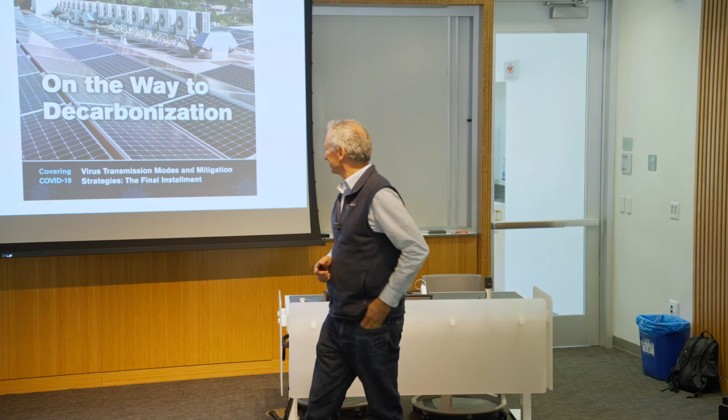I published the first article on building decarbonization in ASHRAE Journal, which is the Journal of Heating and Cooling Systems. It's a US-based organization, but with international membership. You're going to see why I published that article in a journal about heating and cooling systems, because heating is a big nut to crack as far as decarbonization is concerned.

Diana loves me to tell this story. I was a young engineer. I went to school at Berkeley, by the way—don't hold it against me, but I have a lot of love for Stanford. I was working at the Solar Cal Council hotline.

Before the internet, you would call a phone number to get information. The 800 number was a big way of getting information, or you could go to the library. So we would take calls on solar systems for buildings, and I got a call from somebody saying, 'Hey, I'm looking for a solar clothes dryer.'

I was a young engineer—it was an internship, I was in college. I started thinking like a mechanical engineer, about big ducts and fans and a big system that sort of looks like this. Then I said to the person, 'I'm going to put you on hold.' And I said to the other folks on the team, 'Does anybody know what a solar clothes dryer looks like? Because I have a call about that.'

So if we add that up, if you include not just fossil gas, you include electricity, so there's a lot of heating with electricity, it comes up to 4 gigatons of CO2 emissions. So that is roughly about 8% of all global greenhouse gas emissions relating to heating in buildings.

Okay, so Arun Majumdar, who's the dean of the School of Sustainability here at Stanford, he likes to say, I want to talk about solutions that relate to a gigaton scale. Don't come to me with the little things. I want the big things. And so heating is actually a big thing, and we're going to talk a little bit about that.

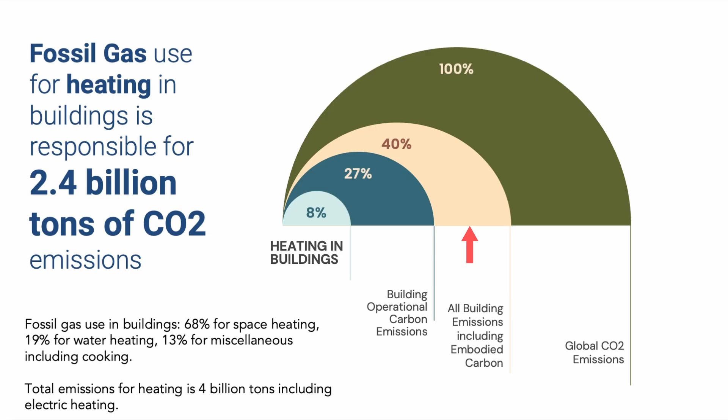But if you look at this graph, 27% of all carbon emissions relate to building energy consumption. And if we include the emissions relating to manufacturing building materials, the biggest part of it is concrete, cement, and then concrete, but also steel, glass, all these other things that we need to build buildings, it comes to close to 40%. Some numbers are 35%, 40%, somewhere in that range of global greenhouse emissions relate to buildings.

So buildings on the demand side are a gigantic part of the problem. And also I like to think a huge part of the opportunity, right?

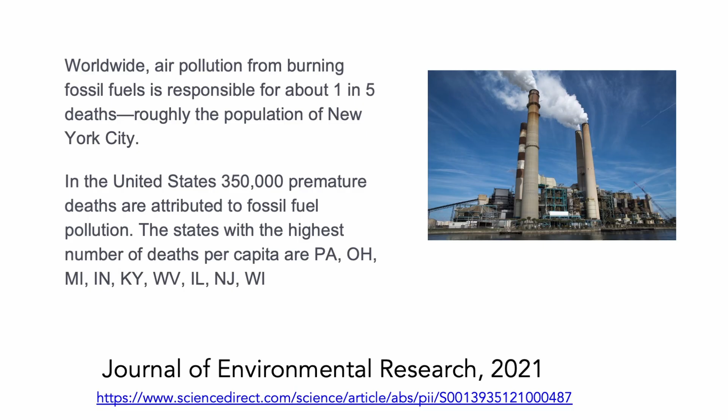So the other thing you guys have probably learned about, burning fossil fuels does create air pollution that directly impacts people's health, right? So worldwide, it's about 1 in 5 deaths related to pollution from fossil fuels. In the US, that's 350,000 deaths per year. So this is a huge thing.

There is debate about, and not in my mind, but people like to debate, climate change and all these other things, but there is this direct thing that's happening right now, not necessarily in the future.

So that's happening. And then in the US, Black communities do bear a disproportionate burden of the use of fossil fuels for a variety of reasons, but there's also an environmental justice part of fossil fuel use.

So for all those reasons, I think that building decarbonization should be a main focus of when we're talking about how do buildings work. I'm going to cover how buildings work roughly, but since this is the energy class, I'm also going to talk about building decarbonization and how that works.

So what we say is the part of the carbon emissions that relate to construction are called embodied carbon. And then the part of the carbon emissions that relate to energy consumption is called operational carbon emissions. Okay, and generally speaking, operational carbon emissions, if we look at it either at the national level or international level, is bigger than the embodied carbon, but they're both significant.

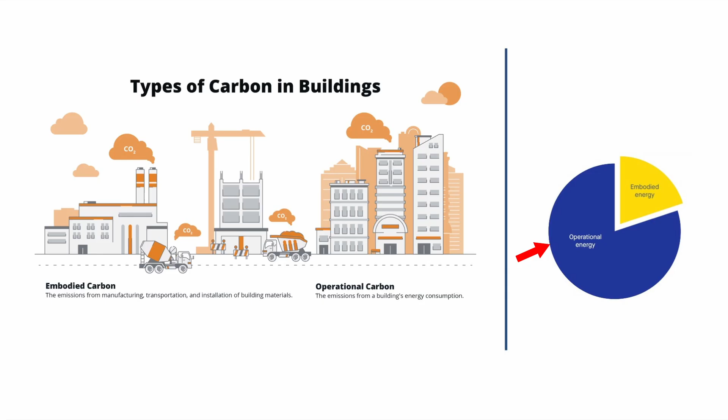So let's just dive a little bit into the embodied decarbonization concept. So if you look at what are the ways of dealing with that, when we look at buildings, the largest part of the embodied carbon is the structural system. So that is, how do we hold up the building? What's at the core of how the building is held up and built? And that is, generally speaking, in commercial buildings, steel or concrete. And in residential buildings, it can also be steel, concrete, but also wood has a bigger role to play globally.

Again, it depends on where you are. In the US, a lot of residential buildings are already made with wood. I live in a house that has wood studs. But then there's other things like glass and furniture and a variety of other things.

But over 50% of the embodied carbon in buildings comes from the structural systems. So right now there's a lot of discussion about alternative structural systems. We can move from concrete to steel, and a lot of markets, especially in commercial buildings, have already moved there. It depends on a variety of cost things.

But we can also now start considering wood structures as a type of structure. One of the areas of research here at Stanford is the embodied carbon of cement, because globally cement is responsible for somewhere around 5 or 6% of greenhouse gas emissions. Just cement alone is huge. So can we manufacture cement in a way that has much less greenhouse gas emissions? There's a lot of research on that going on here.

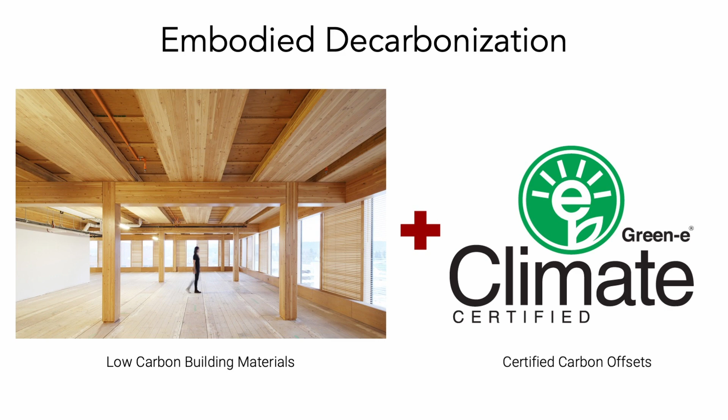But what most people are doing to decarbonize the embodied carbon of a building is looking at low carbon building materials, primarily the structural system. And even wood does have an embodied carbon associated with it. If nothing else, transporting it, cutting it, and getting it ready for building materials does have a carbon emission related to that. So it's not possible right now to get to zero.

So what a lot of folks are doing is they'll do the best they can, and then they'll use a carbon offset of one sort or another. Carbon offsets are a way of avoiding carbon somewhere else so that your project's carbon emissions are offset. I assume you guys have talked about that.

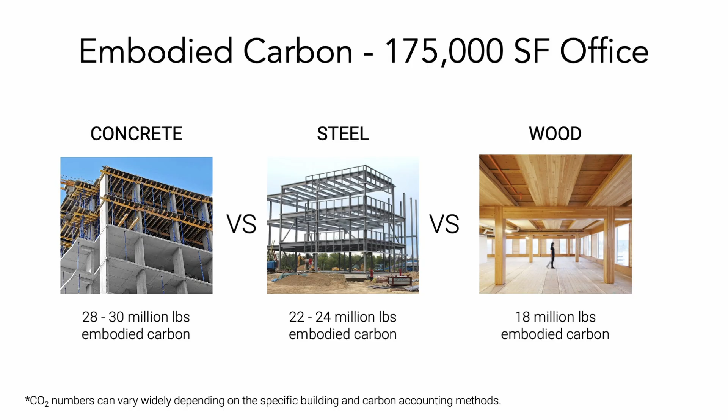So if we look at some of the numbers, this is for a 175,000 square foot office building that I worked on. We looked at the difference between concrete, steel, and wood, and you can see it went from about 30 million pounds of embodied carbon down into the low 20s. So that's good if we use steel, but if we went into wood, we're cutting it almost in half.

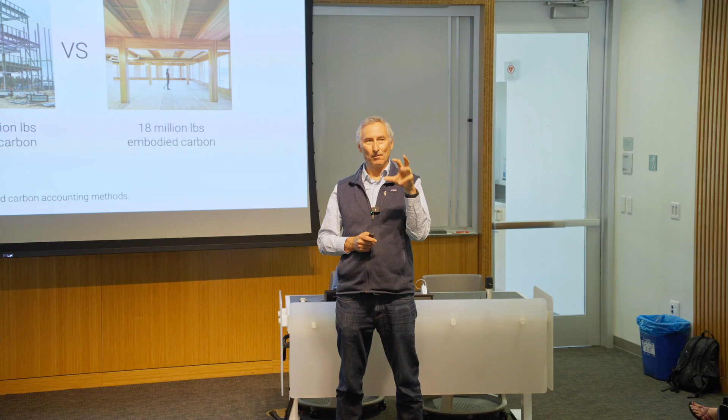So there's still emissions related to wood, but there's a lot of buildings now being built—not high rises, but remember, most commercial buildings in the world are low rise, anywhere from 1 story to 5 to 10 stories. That's the vast majority of square footage.

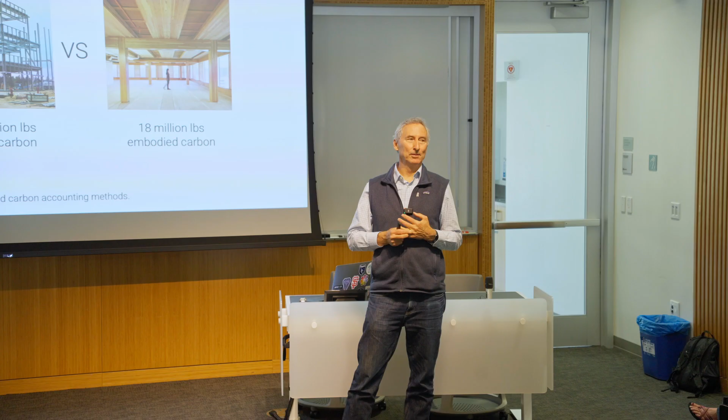So Google, for example, just built a very high profile building with mass timber as a structural system. And they're talking about it a lot, and they're looking at using timber as a structural system in their future buildings. So that's happening.

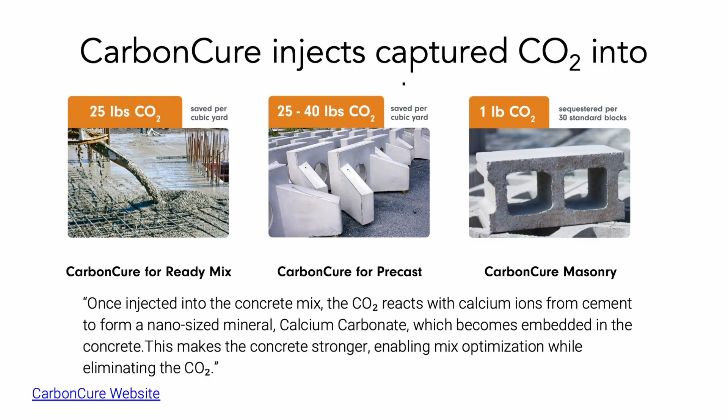And one of the companies that's making a lot of progress on low embodied carbon cement is called CarbonCure. What they're doing is injecting captured CO2 into the cement. So that's a sort of creative or interesting idea. We'll see how far that gets, but it's an interesting thing.

And there's a lot of additives that can be put in the concrete mix that make it still strong, but take sometimes a waste product or organic product and put that into the cement instead of having to put in more cement, which is high embodied carbon. So there's a lot of things going on.

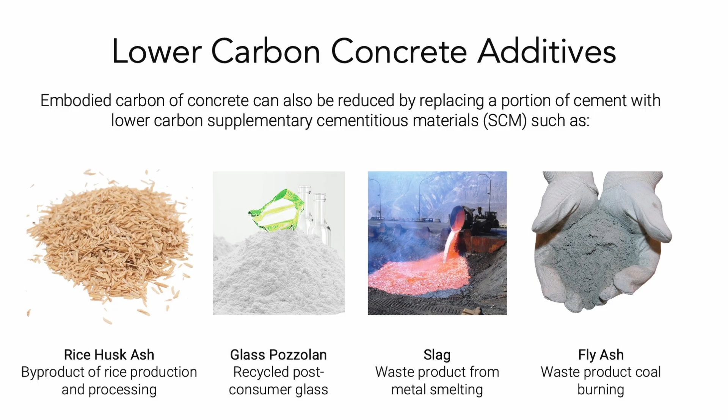I'd say that field of embodied carbon is still evolving, and we're in the early days, but operational decarbonization is actually quite evolved. How long will wood last if used to build the structure of a building?

So if the building does not burn down—because if a building burns, it actually emits all that CO2 into the atmosphere—we can say wood is a sequestration of carbon, so it's actually pretty good if you put it all together. But wood structures that are properly rainproof, which means a good roof and things like that, can last 100 plus years. Most buildings that we're designing that are trying to be environmentally sensitive, if we can design to 100 years, we're in pretty good shape.

And if we can possibly reuse some of that—there are buildings in Europe that I've been in with stone, which is pretty low embodied carbon, just stone, not concrete. But there are buildings with wood rafters and things like that that are a couple hundred years old.

Are there any conversations going on about deforestation when using wood for buildings? If so, what are some measures being taken to avoid deforestation?

This gets into a deep thing about environmental trade-offs, but generally speaking, the wood that's used in buildings is farmed wood. It's not wood from virgin forests, and it's considered to be capturing carbon from the atmosphere, putting that into the wood that then goes into the building that hopefully lasts a long time. So there's that, but there is land that's taken for growing wood, and obviously a virgin forest with old growth trees would be a better environmental thing in that location. But from an overall carbon perspective, using wood instead of cement is better.

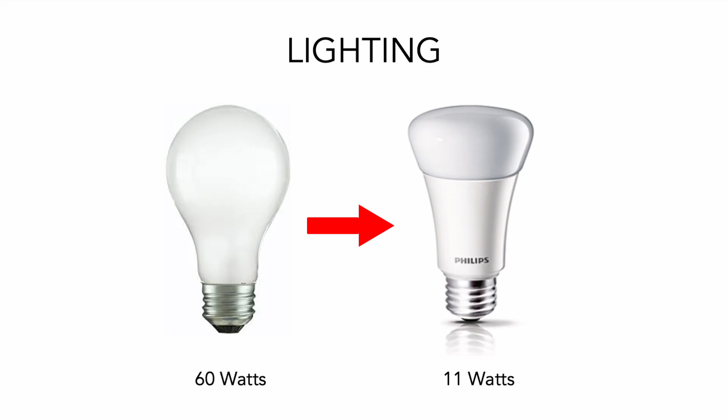So if you look at LEDs, the energy consumption goes from 60 watts to 11 watts. Now you can actually get that same 60 watt bulb in 8 watts LED. And LED light bulbs last almost 10 times longer compared to incandescent light bulbs.

So significantly better. Now, when LED light bulbs came out, I remember they were really expensive and they weren't very good. They were like $10 to $15 for one. And an incandescent light bulb was like 50 cents or $1, and that's just buying it. But then the energy consumption, if you add it up over the lifetime, all these bulbs that are burning out compared to LED, it's going to save the cost of a light bulb several times over. But now the LED light bulb costs around $1. So it went from $10 to $15 down to $1 in about a 15, 20-year period.

So a lot of these things start expensive and then over time get cheaper. So you're going to see that pattern.

Another thing that we've done in buildings to think about energy use is daylight. We're now designing buildings to take advantage of daylight. Can you design the building that brings light in, but without all the glare and too much light? It's not just a glassy building, but a building where daylight was thought of carefully, and we can use daylight to light spaces.

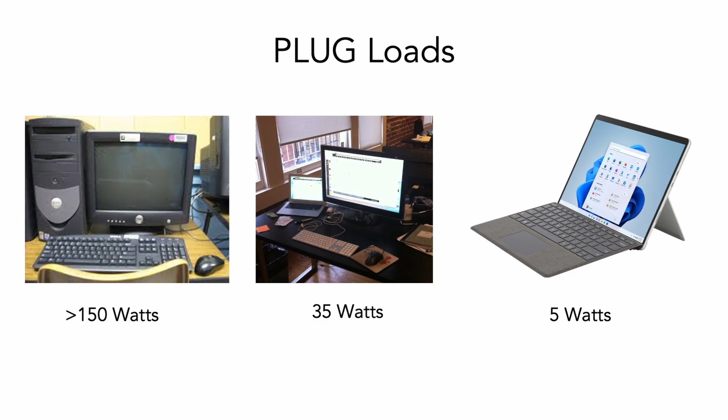And then we've now moved over to laptops with LCD screens, and together, a similar size screen and the laptop can use about 35 watts. The power consumption of computing equipment has dropped dramatically. And now when you have a laptop, desktop, or pad, whatever, those use somewhere in the neighborhood of 5 watts, sometimes 10 watts. Very, very low energy. And the energy's been brought down in large part so that the battery life is extended.

So anyway, that's amazing what's going on. Now we have a lot more computers today than we used to, right? It was sort of a special thing to have a computer. Now it's a requirement that absolutely everybody in an office building has a computer. And now we carry around a cell phone, which is in a sense a computer, right?

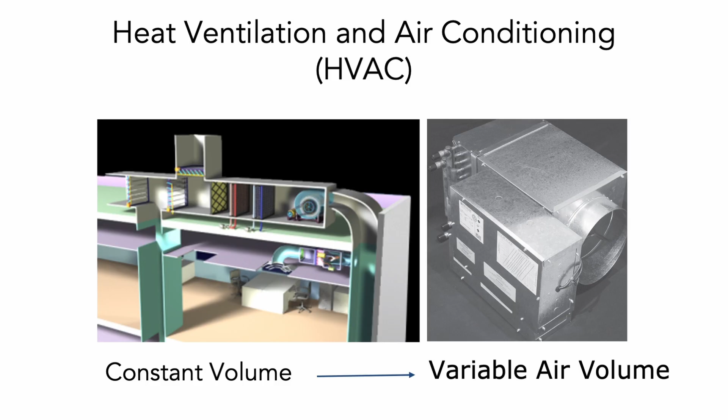So now we start thinking about heating and cooling in buildings. Let's again stay with the large building concept. We started with these systems called constant volume systems, and we moved to a variable volume system. It's sort of like changing from a car that's always running at full speed and you control its speed by putting the gas or the brake on - that's how it used to be in heating and cooling systems. Now they vary the volume up and down based on the need, right? So varying - that's saved a ton of energy, and it's an evolution.

I remember when I was a young engineer working on buildings, and I was asked by my boss to figure out what is this new thing called variable air volume. So I called a few engineers around, older guys, and they were like, 'oh, that variable volume, it's too expensive, it doesn't work, it's a ridiculous idea,' blah blah blah. That's what I was hearing. Fast forward to where we are today, nobody uses the constant volume system and everybody uses the variable volume system, including in this building, right? So that's been a huge energy savings.

So a lot of these things have evolved as we've started to think about, wow, energy does actually cost money and makes a difference. But there's so many more things we can do. When they start thinking about pumping systems - this is what I designed, pumping systems and fan systems - you can track that to how many watts are required for each gallon per minute of water that you're pumping to heat or cool a building, for example. And the way a standard building goes, it's usually about 15 watts for every GPM, gallons per minute.

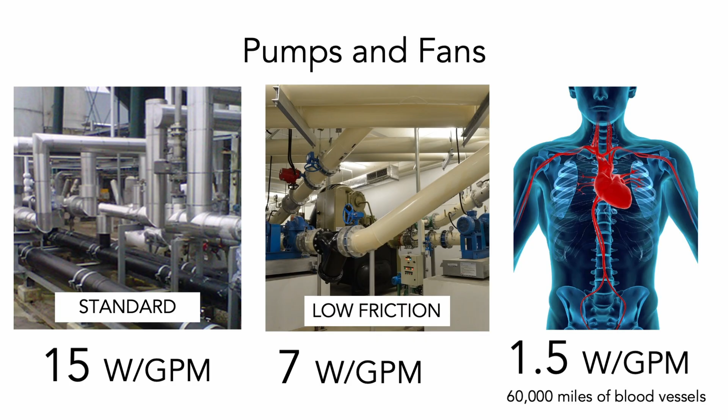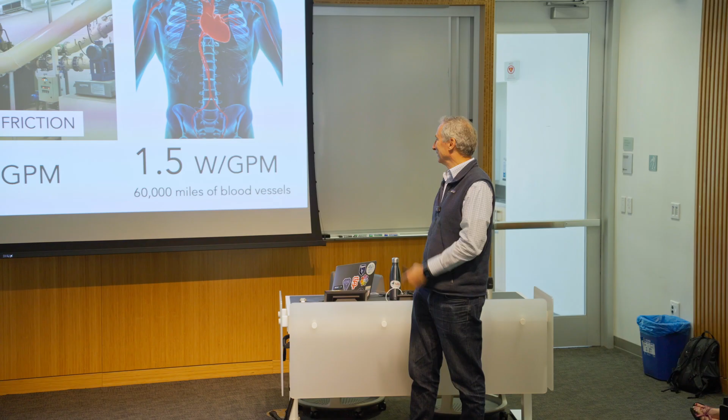When I really focus in and do what I consider to be a really good job, I'll design a low friction system that has smooth pipes and is thoughtfully designed. I can get it down to 7 watts per GPM. But if we compare to the human circulatory system, and you can look these numbers up, it's close to 1.5 watts per GPM. So we're still in buildings nowhere near as good as the human body, which is amazing. Each of our bodies has 60,000 miles of blood vessels, just to remind you how incredible the body is. So not only amazing with 60,000 miles, but it's also super energy efficient.

Anyway, so I like that. There's a lot of blockbusters that have already become standard in buildings. LED lighting is one of them.

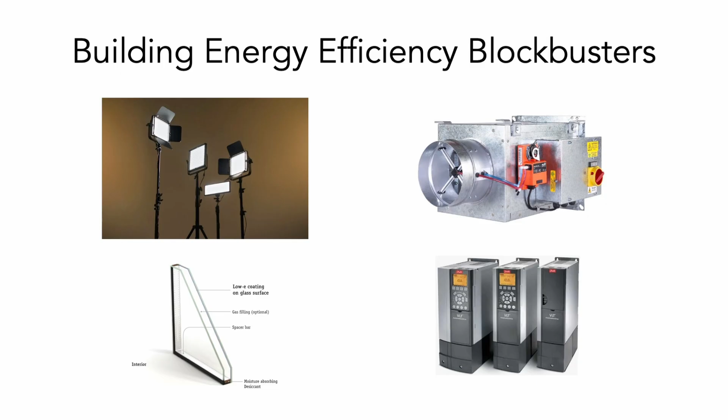On the top right is the variable air volume box, which varies the volume. It has a damper in there and such. That's been huge.

The lower left is low-E glazing, low emissivity glazing, which this building has, and most modern buildings have it, even new residential homes widely use it. There's a thin film you can see through, but it blocks the infrared part of the light. So if you're in a hot climate, it blocks heat from coming into the building. If you're in a cold climate, it keeps the heat inside so it doesn't leak out. Not 100%, but it really slows it down. So it's a big deal.

The bottom right is a box with a variable speed drive that controls motors to ramp up and slow down. Think of all the fans and pumps in buildings, and compressors for air conditioning - we can speed those up or slow them down as needed. That is gigantic.

All of these things have been huge. They say LED lighting globally has reduced the need for a few hundred power plants because we have more efficient lighting compared to incandescent lighting. So it's a big deal.

If we look at when we started focusing on energy efficiency in buildings, it was really during the 1970s with the Arab oil embargo and the oil crisis. That brought energy into focus globally. So ASHRAE, the organization that deals with heating and cooling, got together with the Illuminating Engineering Society, the lighting guys, and said let's create an energy standard for buildings - what does an energy efficient building look like?

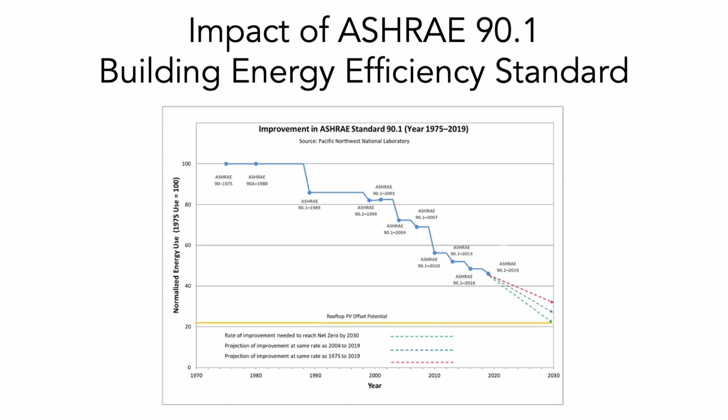So we created the standard, first created in 1975. If we compare a building built in 1975 under that standard to what the standard requires today - which isn't very hard to meet with today's technology - the new version represents a 50% reduction in energy. So that standard, considered pretty easy to meet, has resulted in a 50% reduction in the energy use of new buildings.

That's kind of amazing, because I ask a lot of people how much energy do you think we can save in a building? They say oh, 5%, 10% maybe - but it's already been 50%.

We can comfortably get another - in this case it was 44%, but let's just call it 50% - energy reduction beyond that standard.

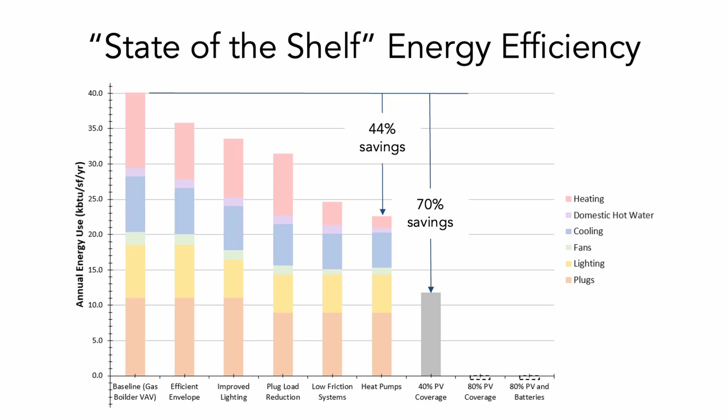That's also significant. If we start adding photovoltaics on the roof, a modest amount, we can get to 70%. In this case we modeled a 3-story building covering 80% of the roof, which would cover all the energy use on an annual basis. So we could really get it down to zero.

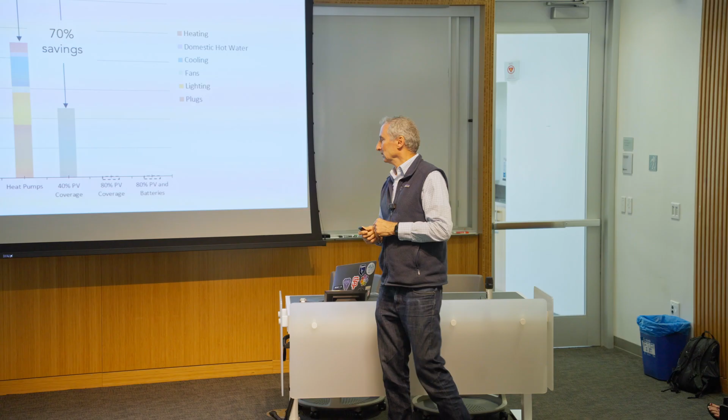The efficient envelope includes better insulation, better windows, a tighter building envelope which is weatherization - those two are similar. All best practices, but nothing crazy. The insulation isn't high tech, we're just using more of it, but using the best windows with low-E coating and things like that.

Does everyone have to follow the ASHRAE - American Society of Heating, Refrigerating, and Air Conditioning Engineers - standard?

The ASHRAE standard has been adopted in some states as an energy code, but in many states it's not required. Several countries around the world use the ASHRAE standard directly or as the foundation of their own national building energy standards.

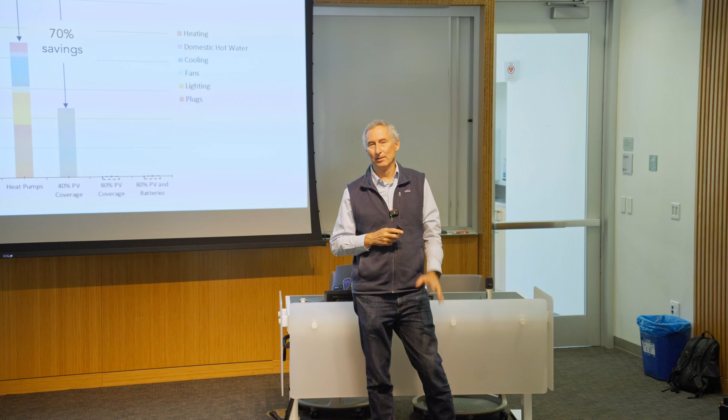In the US, I don't know the exact numbers, but I think about half the states have a required energy code for buildings. But those half states, one of them being California, probably represent 3/4 of the US population. So high population states like California, Florida, New York, Texas, Washington State all have energy standards for buildings. Some are more strict than others.

So what are the next generation of energy efficiency blockbusters? Heat pumps are front and center, and I'm going to talk about that in more detail.

This idea of integrative design - there's a whole class on integrative design here taught by Amory Lovins, and if you have the ability to take that class, I would recommend it. The idea of integrative design is how do we integrate these ideas together to come up with more creative solutions.

Think about a battery electric car. It's not that engineers took a normal car and put batteries into it. What they did was say, can we actually design a more slippery car, a car with lower resistance? Can we do that so the batteries are smaller? And then because we don't have the need for a huge trunk in the front, maybe we can bring the front down a little bit to make it more aerodynamic. So there are all these interactive effects.

That's integrative design. So if I put better windows in the building envelope, can I make the heating and cooling system smaller? You start working things together. I'm simplifying what can become a very complex set of interactions, but that's integrative design.

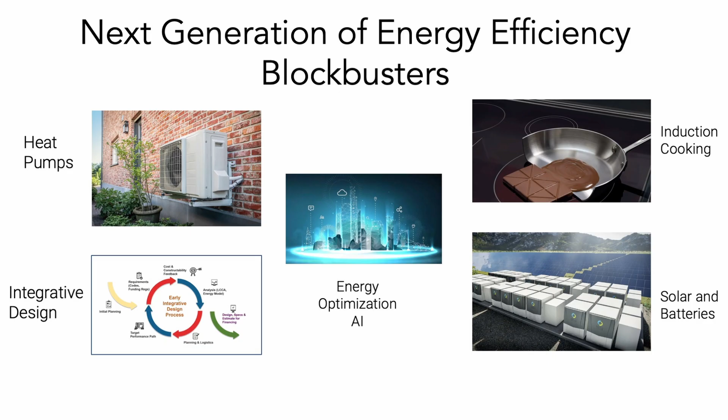Induction cooking, which I'll talk about a little, is another big blockbuster. And then solar and batteries - these can and are being used at the building level, and also at the grid level, which you guys have learned about. That's a big deal.

And then in the middle there, AI for energy optimization. In fact, I wrote a paper with a few graduate students here about how AI is going to change how we design buildings, but also how we operate them. Deep optimization is going to be possible. We think that in existing buildings, lowering energy consumption by 5 to 10% is a realistic estimate of where we'll be with AI in the not too distant future. I think that's going to be very big.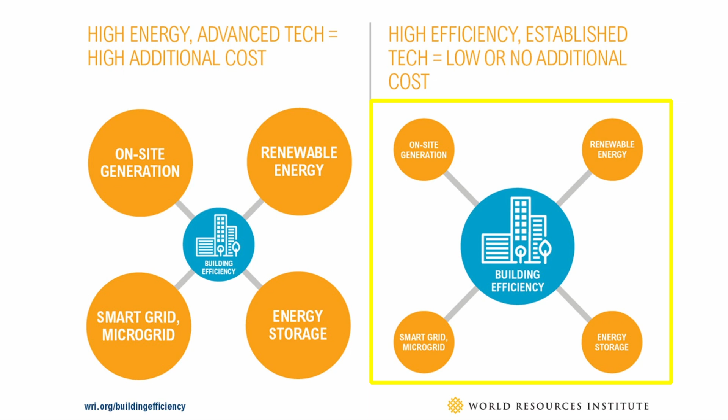When we look at it, on the left we could have not very much building efficiency, but then that means we're going to need bigger on-site generation, renewable energy, smart grid, or energy storage - these things have to be bigger. Or we could take the path on the right, making the building efficient as a key strategy, then we'll need less on-site generation, less renewable energy, less grid - all these things.

Oftentimes people think about the supply side - we're just going to build more and more solar. But if we make buildings efficient, we can build 30% or 50% less solar, 50% less power lines and battery storage, and all these things that are difficult but good - the right thing to do. Efficiency is going to win.

The other thing a lot of people talk about is how fast can we decarbonize. Speed matters right now from a climate change perspective, so we need to move quickly. To say efficiency doesn't matter, we'll just get photovoltaics and wind power to the building - okay fine, that's happening, but it's just going to take longer for us to decarbonize fully or have dramatic reductions in carbon emissions.

That's an important thing. There's a retired professor, Jim Sweeney, here from Stanford, who with some graduate students wrote a book on energy efficiency's impact at a macro level - the whole economy, focused on the US economy.

They said, okay, if we had the same efficiency equipment we had in the 1970s and it just got locked in at that efficiency - car efficiency, building efficiency, trucks, aviation - if all those things were locked in at 1970s efficiency, we would have energy consumption significantly higher than where we ended up.

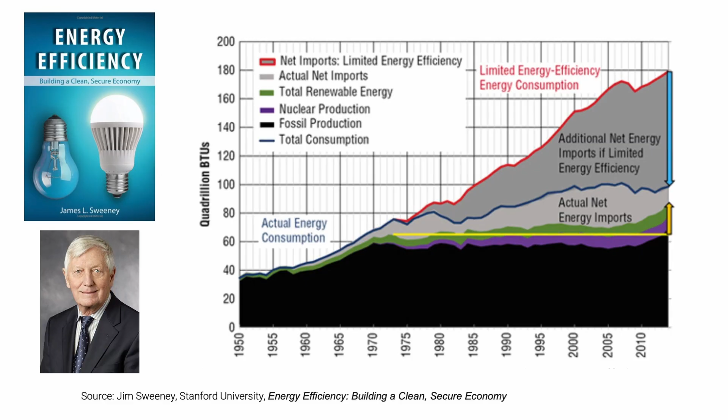Their study was through 2015, so it's a little dated now, but the data is important because it's a decades-long study. What they found is that energy efficiency reduced our demand by 30% in the US, which is more significant, almost by an order of magnitude, than all the solar and wind and nuclear added to the grid during that same time. So energy efficiency is not something we hear about a lot from politicians or policymakers, but it is a workhorse of meeting our energy services demands.

We don't really have energy demands, we have a demand for energy service, right? The saying goes, we want hot shower and cold beer. We don't necessarily want kilowatt hours or BTUs - those things don't matter to us as individuals. So we need to focus on what we're trying to achieve here. So, that's energy efficiency.

The next thing we need to focus on is how do we electrify buildings? Remember, if we're burning a fossil fuel at a building, like for heating, we're just burning fossil fuel and emitting CO2 at the building. We think, oh no, it's just a little thing - like the boiler for this building would be like a third of this room. But that thing is putting out CO2 every single day, and when you add it all up, it's 2.4 gigatons of emissions for heating buildings, primarily space heating, but also water heating.

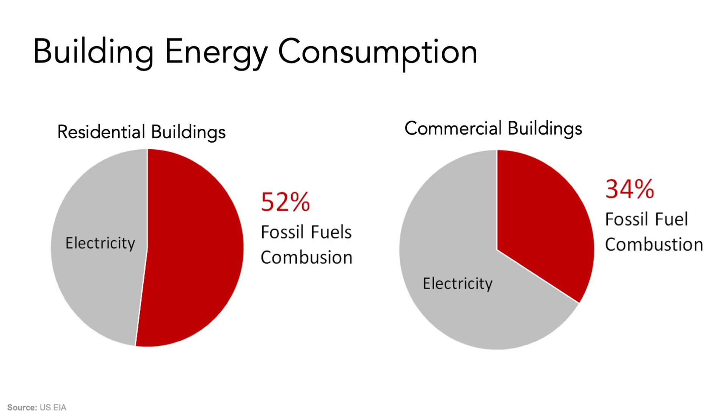So it adds up. We want to electrify buildings - we don't want to be burning fossil fuels at buildings. If we look at US data, residential buildings, 52% of their energy requirements - lighting, everything put together - is met with fossil fuels. And in commercial buildings, 34%. That's mostly all about heating again, heating or water heating. So it's a significant part of the overall energy picture.

In the US, 24 states have committed to have zero carbon electricity by 2050 or sooner. There's already a lot of countries that have zero carbon electricity: Costa Rica, Kenya, Uruguay. The list goes on of countries that are at 90% or higher carbon-free electricity. It's surprising to me - I looked at it recently, and the number's somewhere in the neighborhood of 20 or a little bit more than that.

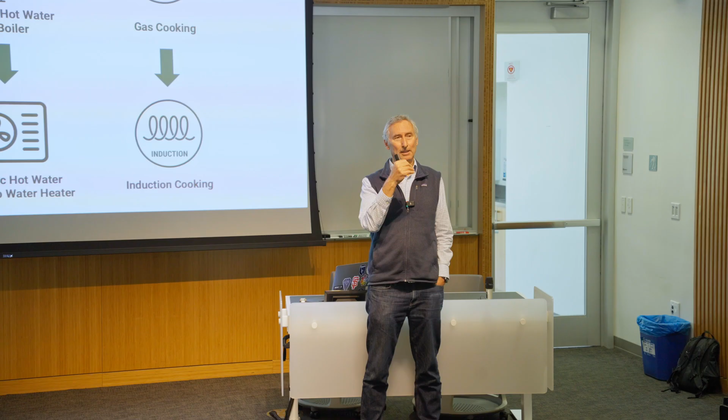California, for example, is moving quickly. We're already at 60% carbon-free electricity on an annual basis, and by 2045, it's legislated it has to be 100%. So, how do we electrify buildings? For space heating, we can use a heat pump - I'll describe that in a second.

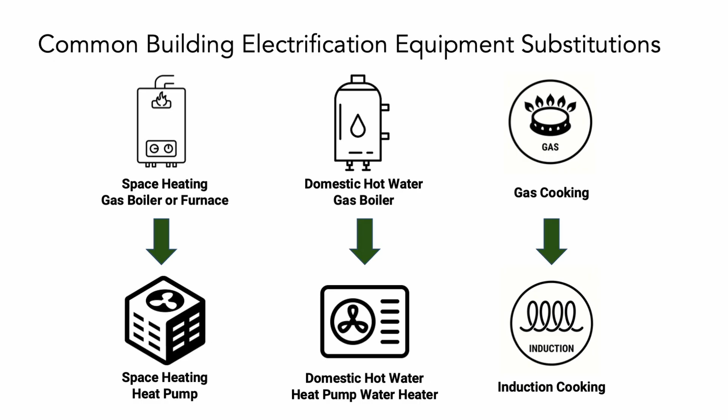For domestic hot water, we can also use a heat pump. We can use electric resistance heating, but electric resistance heating, which has been around for a long time, is very energy intensive. For gas cooking, we can go to electric resistance cooking, or the better, more modern version called induction cooking.

So if we look at heat pumps, how do those work? With a boiler, we put in 100 units of fuel and we get out 85 units of heat. That's an 85% efficient boiler - that's how we do fossil fuels. It could be a furnace, it could be a boiler, whatever.

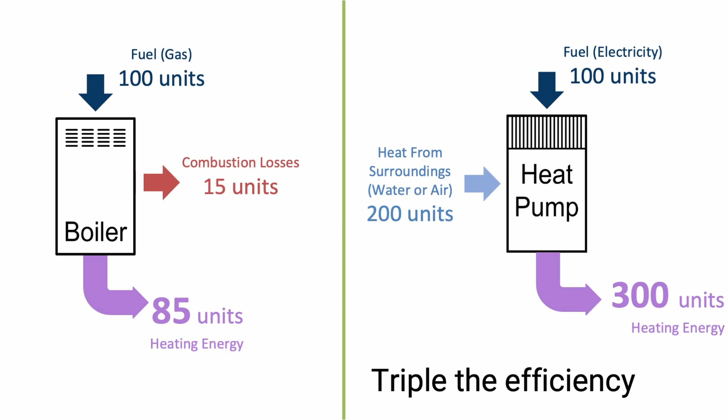For heat pumps, you put in 100 units of electricity and you'll get 300 units of heat out. You're like, wait a minute, that doesn't sound right. The way heat pumps work is they're able to pull heat out of the surrounding, usually air or atmosphere, sometimes connected to the ground, and move that heat into the building. It's the same way a refrigerator works - refrigerators pull the heat out of the cold box and dump it into the kitchen.

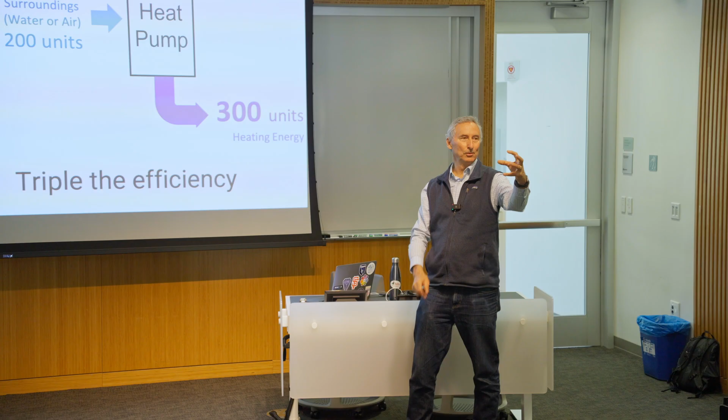That's how refrigerators work, it's the refrigeration cycle. So we can use that same refrigeration cycle to pull heat out of a cold environment outdoors and put it into the building. So we triple the efficiency. Heat pumps are a big deal on efficiency, but they're also a way to electrify heating - in a sense, we're killing two birds with one stone.

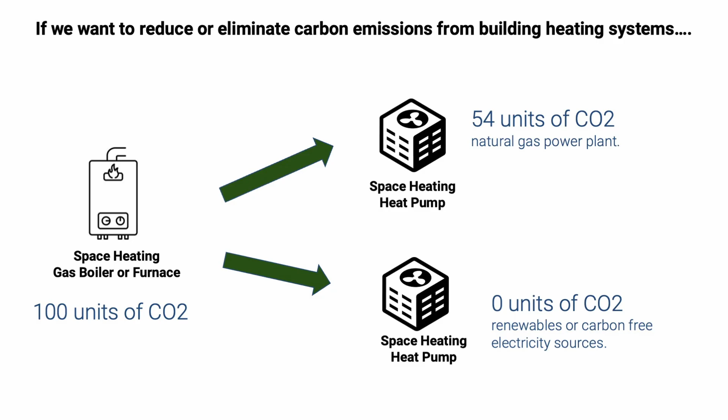Or you can have your cake and eat it too. So if we look at it from a carbon perspective, if we have a boiler putting out 100 units of CO2, that same heat pump, if it's powered by natural gas at a power plant creating electricity, because the power plant is efficient and heat pumps are super efficient, we'll get 54 units of CO2 emitted at the power plant instead.

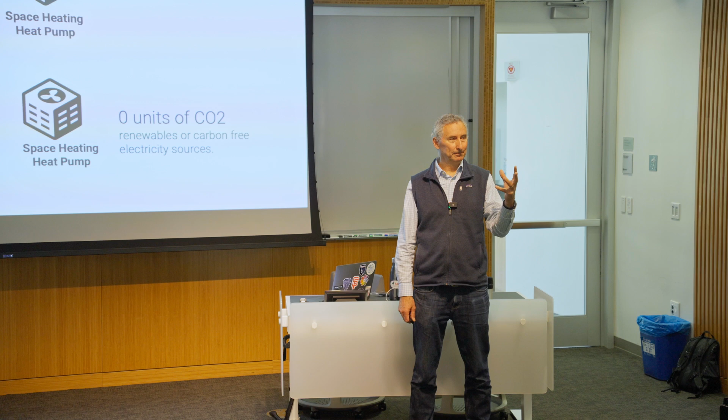Same thing with heat pumps. Even if we have a 100% natural gas grid, we're cutting our CO2 emissions in half. But most grids in the US and globally are not 100% gas or 100% coal—there's some mixture. So if we're able to plug that heat pump into a zero carbon emission grid, we can get the CO2 emissions down to zero.

I have solar on my house, and I also try to run my heat pump in the daytime, when I know there's more solar electricity on the California grid. So between my solar on my house and getting renewable electricity from the grid, I'm close to running my heat pump with zero CO2 emissions. So something to think about.

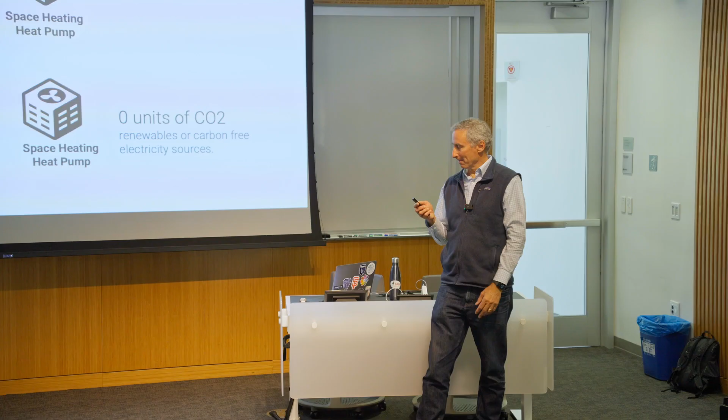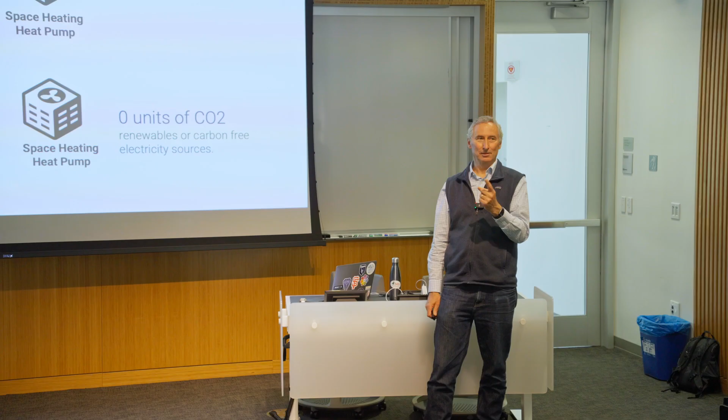Now, heat pumps—remember that number, 2.4 gigatons. Heat pumps have the potential to eliminate that. When you talk to people at energy agencies, like the International Energy Agency based in Europe, thinking about energy policy globally, heat pumps are a huge part of the conversation. I don't mean to harp on just a heating system—I just want heat, don't tell me about the details—but heat pumps are really big. They're a really big deal.

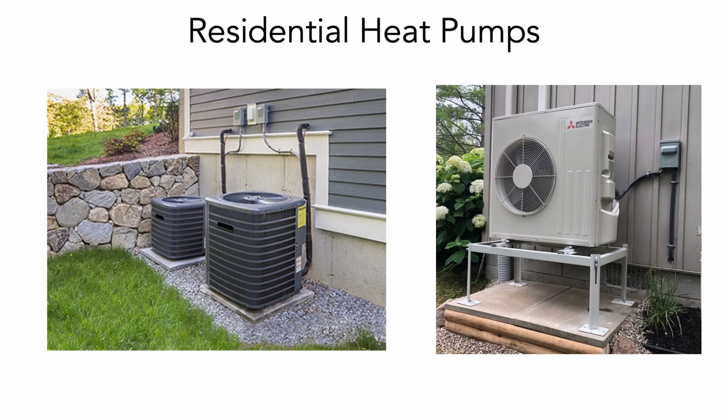So this is what they look like on people's homes. We've actually had heat pumps—you can get an air conditioning unit that can reverse and do heating as a heat pump. On the left, we've had those kinds of things for several decades in the US. But more commonly now are these skinnier, suitcase-shaped units popular in Asia, now globally available. I have one on my house here in California, and it can do heating or cooling—one piece of equipment can do either because it uses that refrigeration cycle. It's actually really nice.

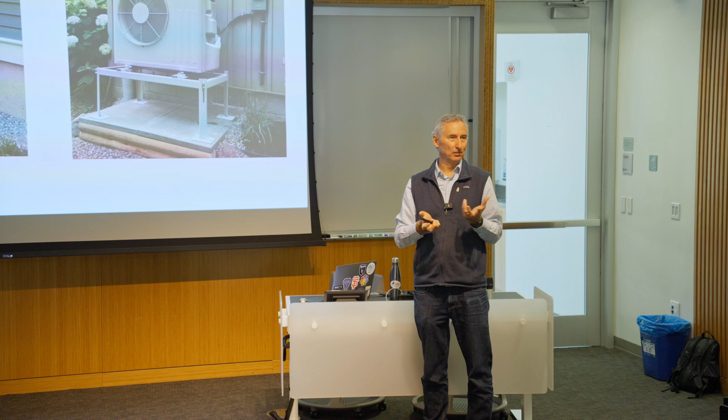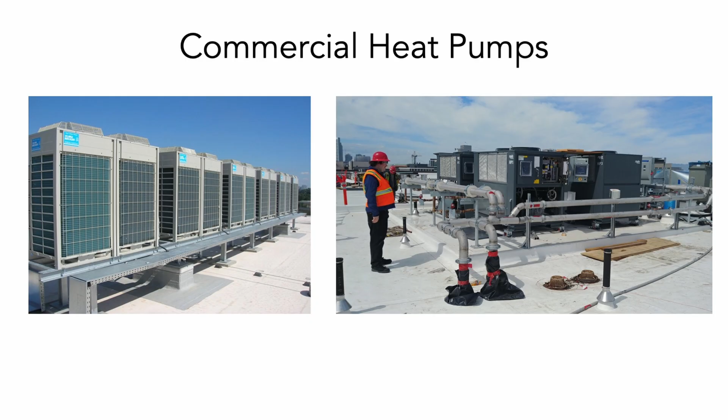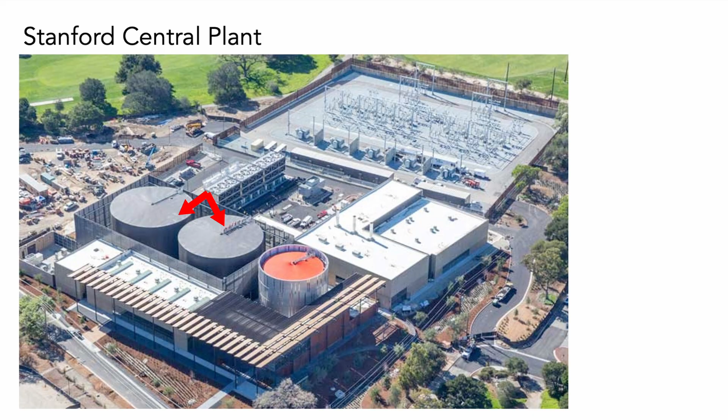And you can really scale it up. Stanford has a central energy facility that makes heating with heat pumps. It uses big machines called chillers that make chilled water for cooling buildings as well as hot water. It makes both, stores them in those big tanks, and then distributes them around the campus. So it can be really small, and it can scale up to really big.

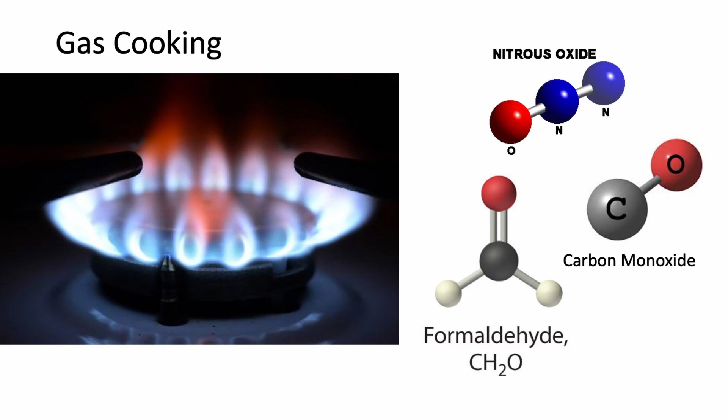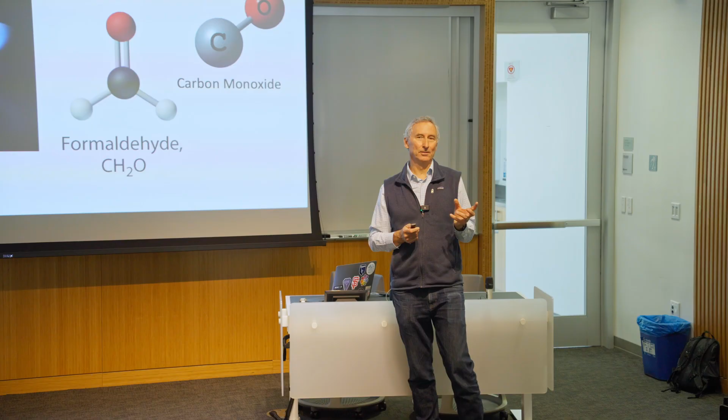So a little bit about gas cooking. Gas cooking is popular in a lot of places, as is electric resistance heating, but gas cooking—the problem is it does emit a variety of pollutants into the kitchen area: nitrous oxides, carbon monoxide, formaldehyde, and now a group at Stanford has been doing a lot of research on benzene emissions from natural gas burning in the kitchen. Benzene is a very well-known carcinogen, not to be ignored, and the levels are well above what's considered safe in kitchens.

If you do have a gas stove, you should always use the exhaust when you're cooking. But induction cooking is the modern replacement to that.

Gas cooking, because so much of the heat goes around the pot, it's only about 30% efficient. Induction cooking, we can get up to 80% plus efficient. So significantly more efficient, but induction cooking uses a magnetic field to heat the pot.

It moves really fast. It typically boils water faster than gas stoves. It's more precise. You can get to the temperature you want more quickly, medium high, and it's not like the electric resistance stove of the past where it's really slow and has that coil that heats up. It doesn't do that, it's a magnetic field.

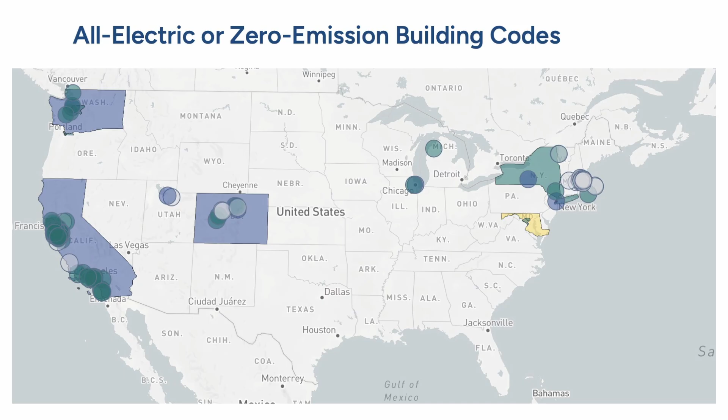There's commercial versions of it, there's residential versions of it. So anyway, if you think there's all these strategies for electrifying buildings, now there's all-electric or zero emissions building codes in a variety of places in the US. And generally, what we're seeing is the market for these things growing very rapidly.

In 2023, heat pumps in the US, there were more heat pumps sold than gas furnaces, they crossed over. Europe is going very hard into heat pumps. Why? Because they discovered that their natural gas supply from Russia was somewhat fragile. And so there's a big push to transition there. A variety of other countries in Asia are also focused on that.

I have a couple students in my class who are from the Middle East, and they're like, hey Peter, energy in our country is super cheap, water is more expensive than gasoline and things like that. But what they've told me is that water heating in these countries, Saudi and Kuwait, the vast majority of water heating is done with heat pumps.

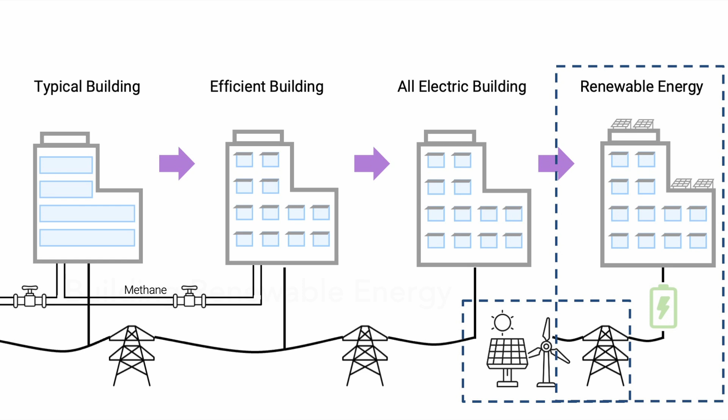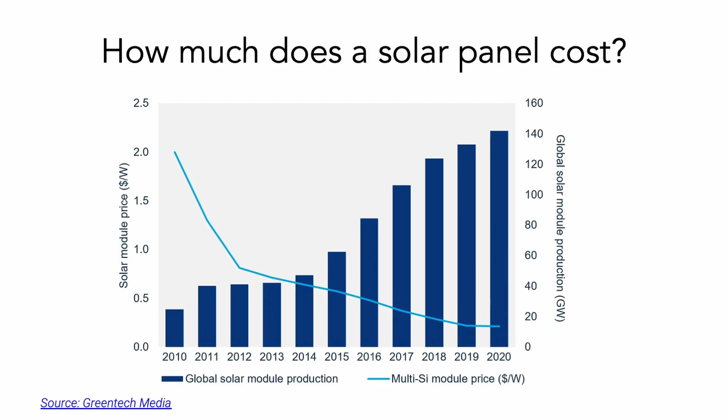Interesting, so we're seeing a lot of movement in that electrification. And then building renewable energy is the last little piece of our puzzle. And the thing you should know is that when I was your age, solar cost about $20 per watt. Today, it costs for a solar panel, just the PV, it's down around 20 cents a watt. That's a factor of 100 reduction, not a factor of 10, 100, $20 down to 20 cents.

So solar is, every time it goes down, there's a surge in use globally. Globally, last year, 80% of all new electricity added to the grid was either solar or wind. 80%. Okay, so solar and wind have become not just affordable, they've become more affordable than gas and coal and nuclear power plants. And that's why there's just a surge in growth in solar.

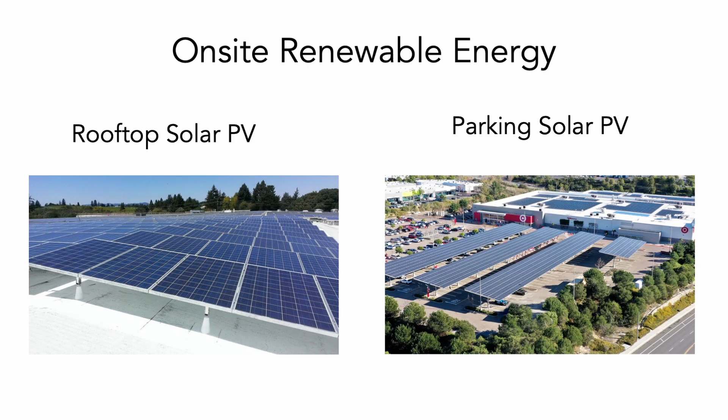But at buildings, we can put solar on the roof, we can put solar over the parking, there's a variety of things. Now, if you're in an area like my students who are in the Middle East, where electricity is so cheap, they're like, okay, we're not going to put solar on our building because electricity is so cheap. But most people in the world live in places where electricity is relatively expensive. And putting solar on the building, even if there's solar on the grid, solar on the building can be an affordable way to generate your own electricity. And so we are seeing a continued interest in solar on buildings.

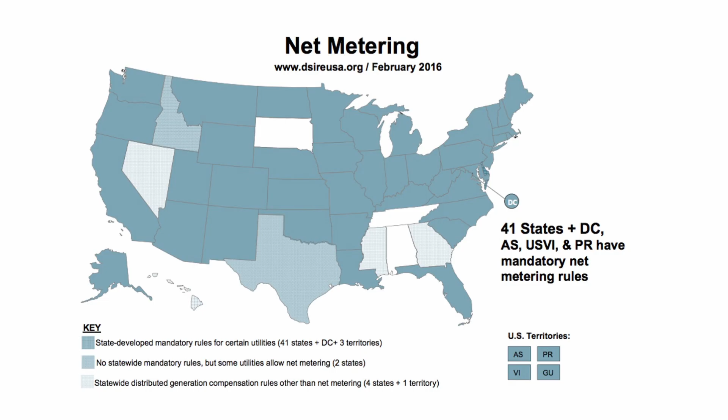In the U.S., there's a variety of states that have this net metering. If you generate one extra kilowatt hour of electricity in the middle of the day, you can send it back to the grid, and the utility gives you full credit for that, and then you can buy it back, or you get credit for it, you get it back at night, in essence, for free. So it's called net metering.

Now, in California and some other places, they're starting to say, wait a minute, you need to pay extra for grid services. But in many countries, 80 countries in fact, there's a feed-in tariff idea where they're not just giving you credit, they'll pay you extra to send solar-based electricity into the grid. So there's a variety of ways of incentivizing generating electricity at the building.

And then the other thing that's also coming down now is batteries. You guys have probably talked about that. Battery costs, they're not done coming down. I'd say solar, we're sort of near the bottom, 20 cents. But batteries are still coming down, though they've come down dramatically in the last 10 years. And so that's making the use of batteries at the building very interesting and attractive. So we're starting to see battery storage at buildings for a variety of reasons.

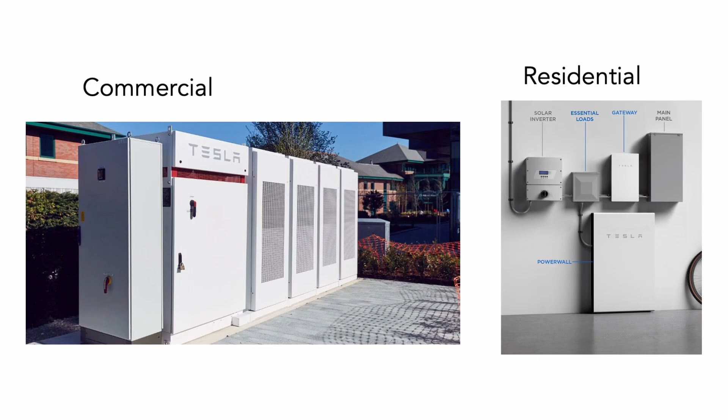Resilience, like a power outage, but also if I have extra solar that I'm sending back to the grid—in California right now, they're like, well, we don't really want it so much, we have a lot of solar. Well, you can keep it at the building with batteries.

The other thing is now electric rates are starting to have different time of day rates. So what we can do is when the time of day is cheaper electricity, you charge up the battery. And when electricity is really expensive, you stop buying from the utility and just use the battery to power your building. So we're starting to see a lot of solar batteries at the building.

But we can also now buy renewable electricity from the grid, and there's a variety of different programs. What I found out is that globally, many different countries have programs—in Europe, Asia, US—where if you don't have solar at your building but you want renewable electricity, wind or solar, you can ask for that.

In the US, we have this thing called community choice aggregation. It's one of the more popular ways of doing it—I can say I want to buy it, and if there's a little extra charge, I'm okay with it. Usually it's like 1% to 5% extra, a very small additional fee, to know that 100% of your bill that goes for generation is going to a company generating using wind or solar. You don't actually know that the electron that gets to your house is from that—it doesn't really matter, but your generation part of the bill is going to a renewable provider.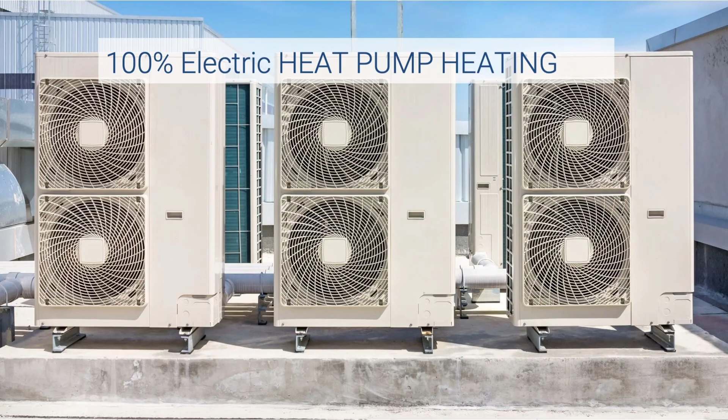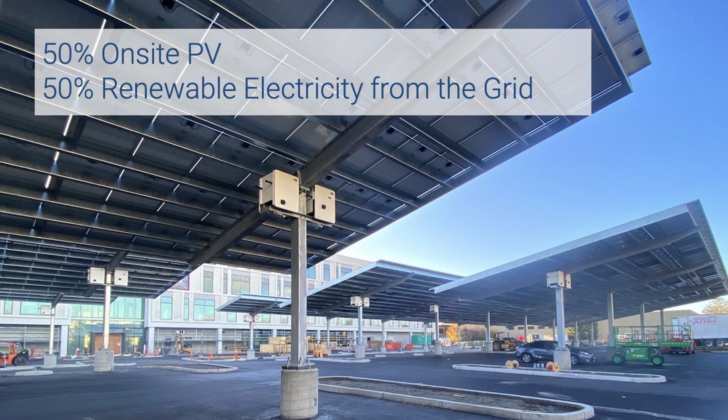And then they put solar PV on the roof and in the parking lot. 50% is on site, meaning at the building, but the other 50% of electricity they need, they buy from the utility. It happens to be a municipal utility in Alameda, and that utility already, as of 3 years ago, buys 100% of their electricity from renewable sources—geothermal, wind, and solar.

So it's somewhat unusual—this company, even if they didn't have solar, would have had 100% renewable electricity, but they wanted the solar because they did the economics of it and said this is saving us money and giving us a good return on our investment. So that building is fully decarbonized from an operations perspective.

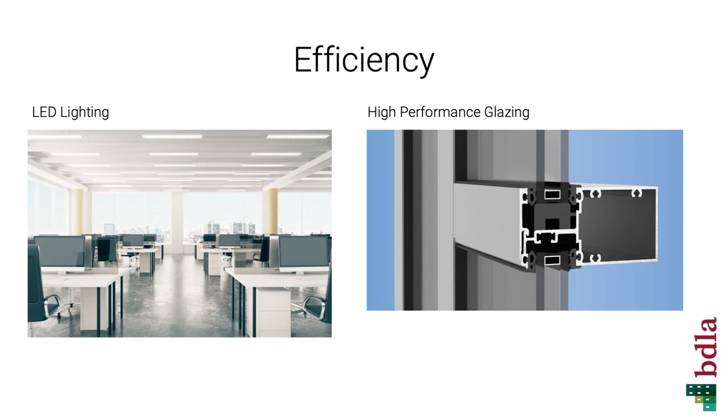Really love it. We're working on the American Institute of Architects headquarters building in Washington, D.C., a few blocks from the White House. First, we're making it more efficient—this is a renovation of a 1970s era building. So we're making it efficient with LED lighting, putting in new glass, doing a lot of nice things. We're taking the old natural gas boilers and replacing them with heat pumps on the roof.

And then how are they going to do the renewable energy? They have a little bit of solar on the roof, but it's a 7-story building and the heat pumps are up there.

So they're going to buy renewable energy from the grid. Washington, D.C. has a program called Community or DC Power Connect. They're going with this company called Clean Choice Energy, which is one of the options, and they'll be buying 100% solar and wind.

So that's operational decarbonization. The cool thing about this project is the embodied carbon. First, if most of the embodied carbon is in the structure, renovating an existing building is better than building new. They actually looked at buying or building new in a suburban area, but decided to stick with the existing building for lower embodied carbon and it was a bit cheaper. Then they did a lot of renovation, new glass, new furniture, which has its own embodied carbon.

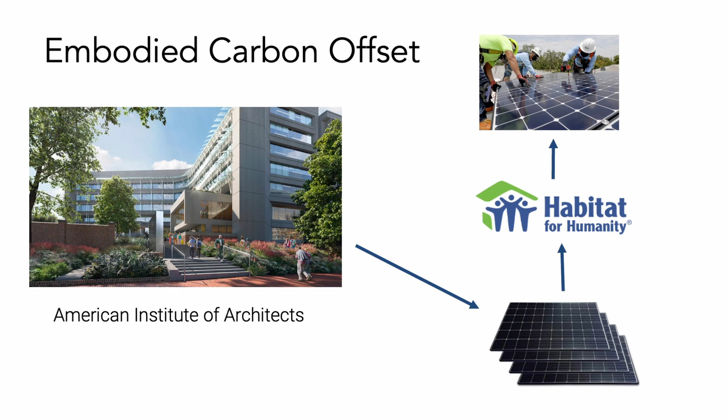So what they're doing is buying solar panels and donating them to Habitat for Humanity, who install them on low-income homes in Washington, D.C. and Northern Virginia. When those panels go on a building, they offset electricity from a grid mix that has a high percentage of natural gas power plants, so those plants use a little less energy and produce a little less CO2.

We calculated how many solar panels they'd need to donate to equal the embodied carbon of the new materials going into the building, like the glass and furniture. So this building will be both operationally decarbonized and embodied-carbon decarbonized. I believe it's going to be the first building in America that's fully decarbonized. Very, very cool.

I've also been working in India for about 15 years with a company called Infosys. If you're watching the French Open, their logo is right there on the boards. They're a big IT company in India working with Fortune 500 companies from all over the globe. They have 300,000 employees—I have to check every time, last time I had this slide it was 250,000, they've grown a ton—and 40 million square feet of offices.

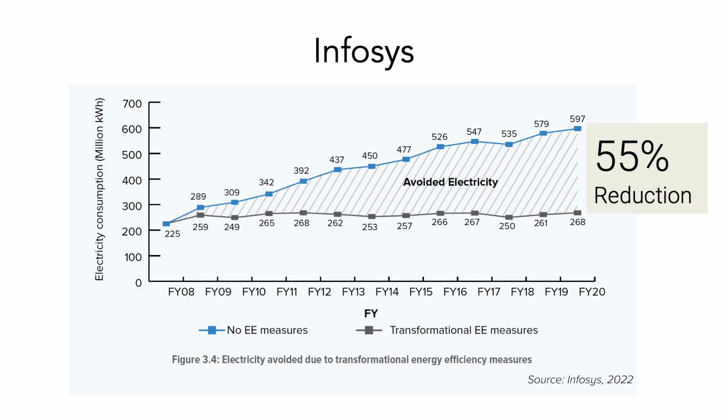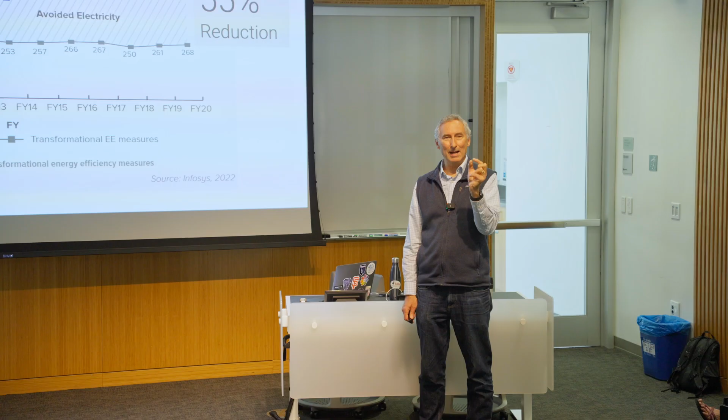We've worked together on a program and reduced their energy consumption by 55% during that time, per employee. They went in hard on energy efficiency and found they could save a lot. They do all the right things: better glass, better building envelope, a very low-friction system for distributing heating and cooling. They end up with spaces that have good daylight, are more comfortable for employees, and use less energy. What's amazing is they've cracked the nut on making that affordable—their buildings don't cost any more than what's typical in the Indian office building market.

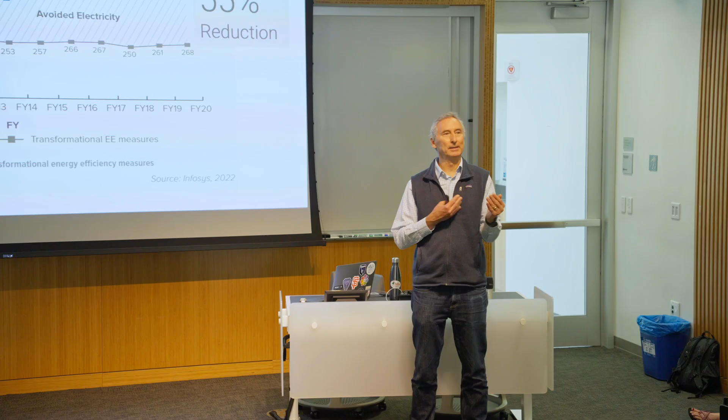It's an amazing case study. They have a whole book written about it that's free online if you're interested in more details. So with that, I'm going to end.

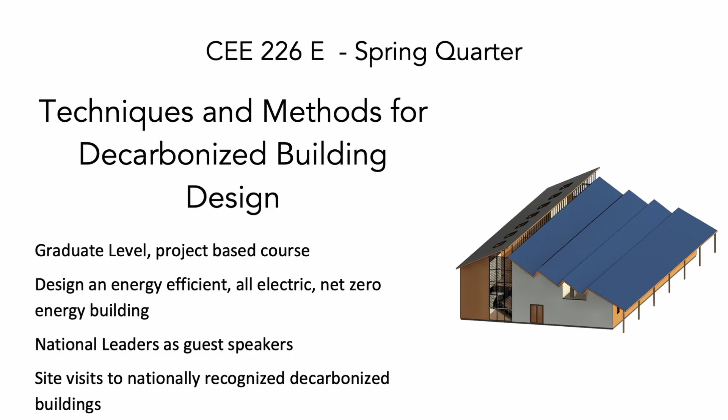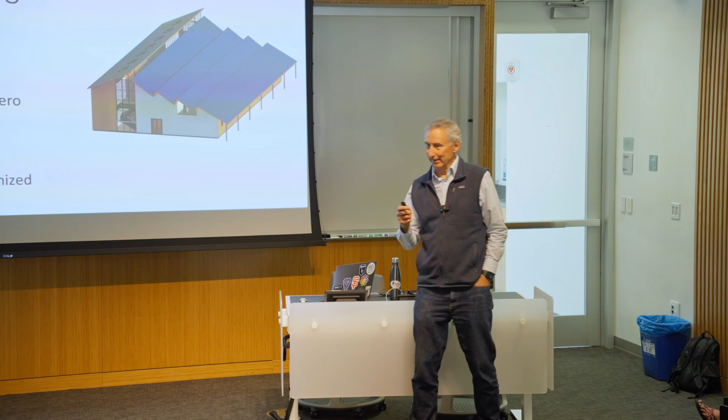I teach a class spring quarter called CEE 226E, techniques and methods for decarbonized building design. Students get into how we apply these straightforward techniques to design a decarbonized building. It's a group project type class with a variety of assignments that give you experience in how that's all set up.

We've also set up the Stanford Building Decarbonization Learning Accelerator, where we've created a wide variety of teaching material on building decarbonization that we make available to professors and lecturers around the world. We now have over 200 universities using this material, along with a variety of professors, and private companies trying to get students, clients, and larger companies thinking about decarbonization, because it is straightforward.

But it's a different way of doing buildings. Remember what I started with—there's so much momentum in the way we design buildings that it's hard to get people to change, even when the new way of doing it is actually very affordable, simple, and straightforward. So thank you.